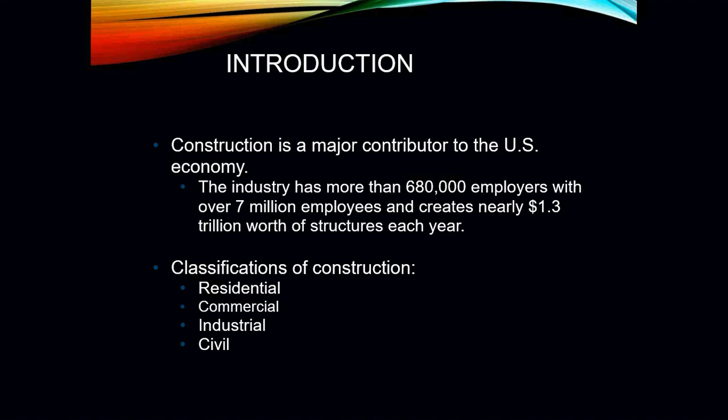Your residential construction really is simply your homes, your single-family homes, your small apartment complexes, condos, areas of that nature would fall under those types of classifications.

Your commercial will fall under all of your offices, your apartment buildings, hotels, stores, shopping centers, malls, maybe even some factories. That's really where those are coming from.

Your industrial is a lot of your refineries, your paper mills, and much larger structures. Your civil construction is all of your highways, your bridges, your airports, your dams, so on and so forth.

In the HVAC industry, we will work on all of these different classifications. If you could think about it, HVAC is pretty much everywhere. We're not just dealing with heating and cooling a space, but we also deal with ventilation. We also deal with exhaust. We deal with every aspect of some sort of air movement and air conditioning.

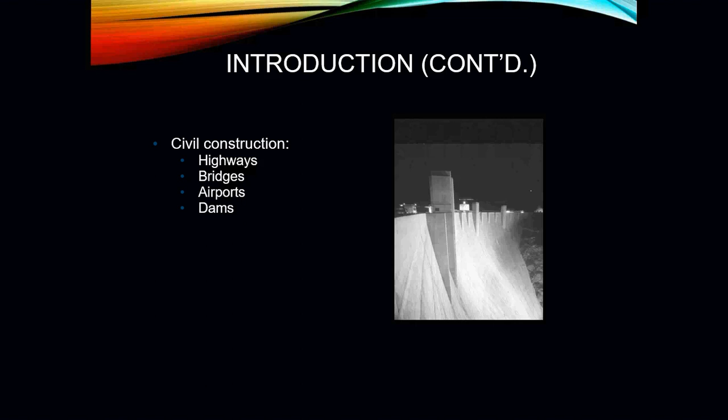With the construction process, the first thing that has to happen is you've got to have some sort of idea and a design. That design comes from the owner. They definitely come to an architect with some sort of idea, some sort of concept that they want to have built. Now that could be a home, that could be a factory, it could be a business. It's unlimited. So the first thing that they do is they're going to contract an architect.

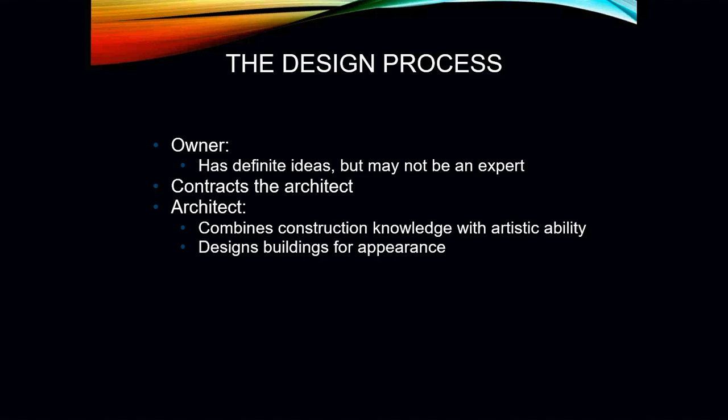An architect is going to have not only artistic ability, but they are going to have construction knowledge, and are going to be able to take those two areas to come up with a design of what this particular owner may want to have.

So architects not only take care of what the building is going to look like, they're also going to help determine the amount of space that's going to be needed for this idea. It's going to help decide how many rooms you're going to need, the type of building.

Is it going to be a wood structure? Is it going to be a brick structure, concrete, you name it? And they're also going to give you a rough idea of how much it's actually going to cost to put the building together.

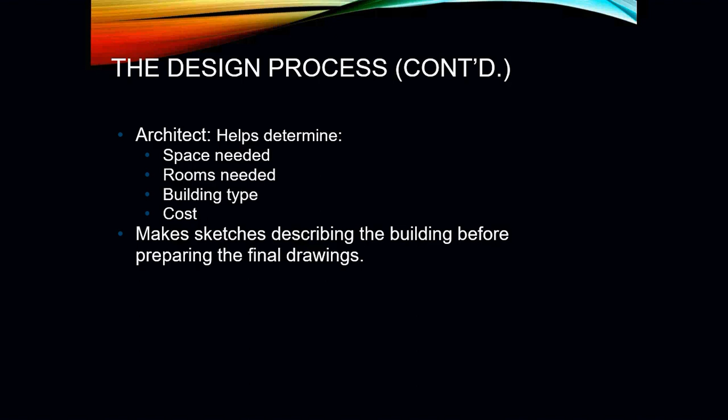They are also going to take everything and put it onto a sketch, basically describing the building before it's actually start to build and before they start putting it into an actual final drawing of what the building is actually going to look like.

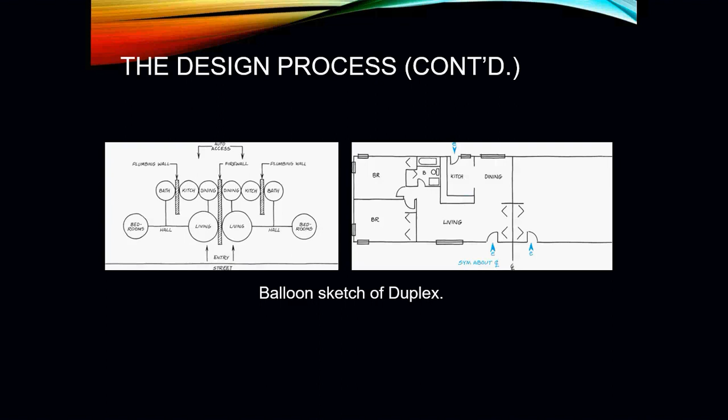So before a lot of our details in a blueprint and in sketches are actually finalized, you've got to have other professionals as well come in and give input and feedback and see what else has to happen before you actually start to break ground.

Now, those other professionals are obviously your HVAC contractors, plumbing, electrical, fire suppression, if that's a part of it. You're going to have roofers, you know, a general contractor. All of these guys are going to come in.

They're going to be reviewing the prints to get an idea of what has to be done on their end, and they also have to be able to follow all of your building codes that specify for their particular area of construction. A lot of our codes come from our International Mechanical Code Book, our NFPA code books, and our International Residential Code Book.

The list just goes on. Really, these codes come from the International Code Council, and they publish several different code books every several years with any changes that have been made. So the industry is always changing and developing.

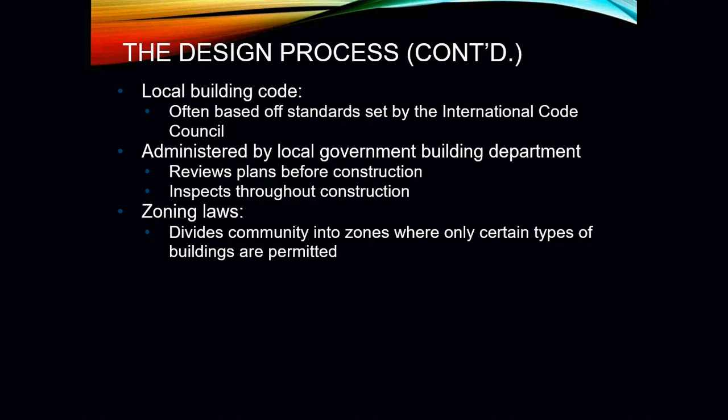And if that ever does happen, there are other procedures that have to happen for that to actually occur. So the building department usually requires specific procedures to be followed. First thing, obviously, you've got to have all of your building permits. Without the building permit, you cannot start to build. Your building permits also notify the building department of your planned construction.

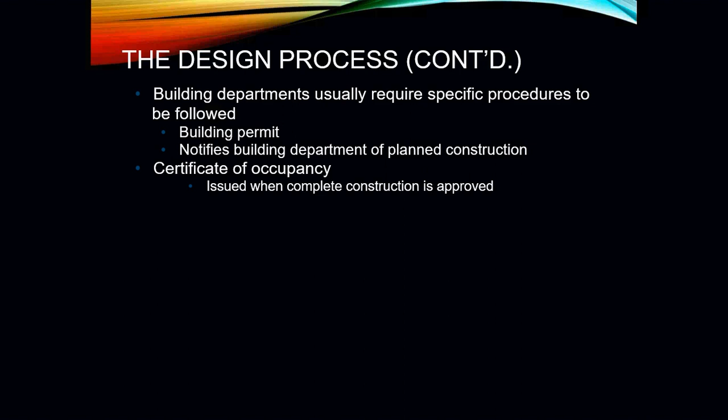It's on the books, they know that it's there, they know that it's going on. Once the building is completed and it is ready for occupancy, the building officials come out, they inspect it, they sign off on the building, and then they issue what is called a certificate of occupancy. That is basically nothing more than an issue that says, hey, the construction has been approved, you're good to go. But obviously, there's more to it than just getting permits and contractors.

You've got to have the money. You've got to also have the money to be able to even do the construction. So beginning after whatever your finished design is that you want it to be, now you've got to go to your lending department, your banks, and get approved for your job. The most common form of that for homes is obviously through a mortgage.

The owner either approves it or doesn't approve it. And if it's approved, now they go to your lending institution with all the proper documentation where they get the financing to build this building.

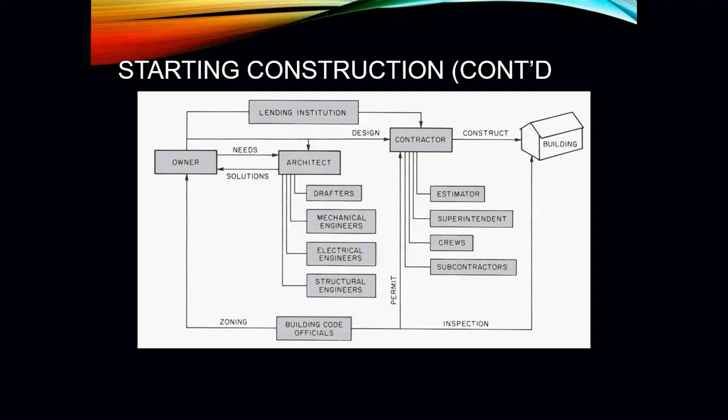Once that's all taken care of, the contractors are now hired. The contractors will then be able to have their estimators, their superintendents, their crews, and subcontractors all involved in making the job happen. Once the building is actually complete, the building code officials are going to come in, inspect the building as it's being built and as it's finished to sign off on it, and give the building a certificate of occupancy.

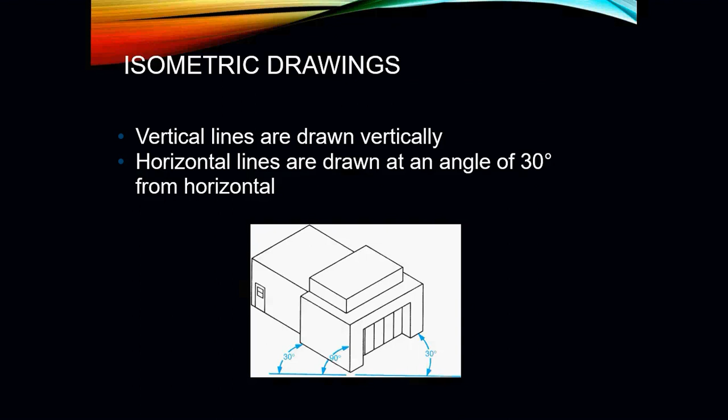When it comes to the drawings of these things, this is where a lot of our architectural drawings come from. They use what we call isometric drawings. These are vertical lines drawn vertically. All of our horizontal lines are drawn at angles of 30 degrees. So it's kind of like a three-dimensional object, which gives the owner and everybody involved an idea of what the building will actually look like.

All the lines of an isometric axes are drawn in proportion to the actual length of your building. Because obviously, when you're looking at something outside, the further away from you, the smaller it gets. This is basically the same idea of what an isometric drawing and a rendering would look like. It's basically giving you a 3D version of what is going to be involved in the final project.

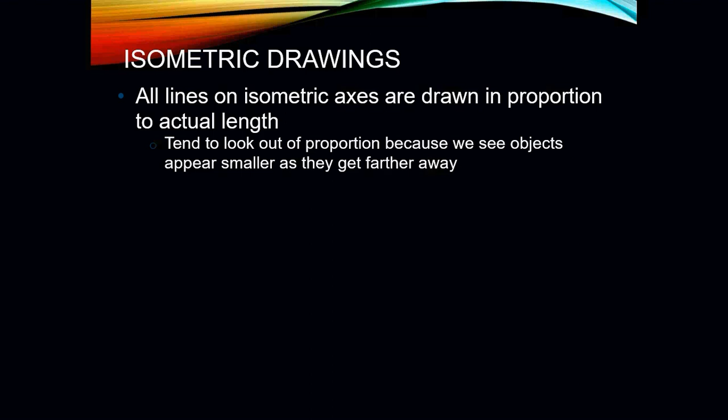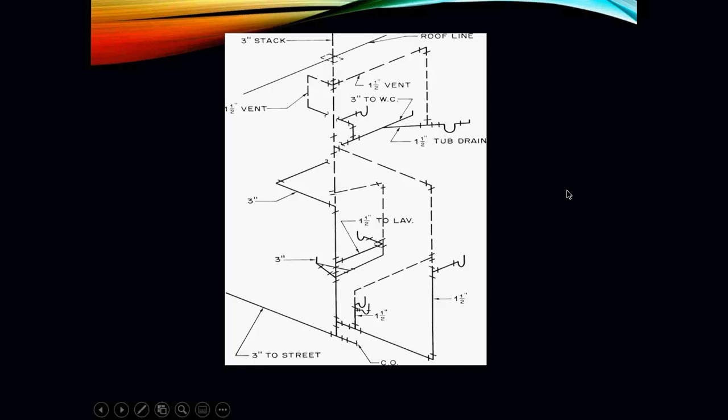Here we have an isometric drawing of a plumbing layout of all of our pipes that are actually going to be laid out. In this case, it looks like it's a 3-floor or 3-family house. We have all of our vents, here's your main vent, here's your street, and here's your traps for your sinks, your toilets, and all that stuff. So this is a basic rough idea of what types of plumbing would be needed to put the plumbing into a home for all of your sinks and your toilets.

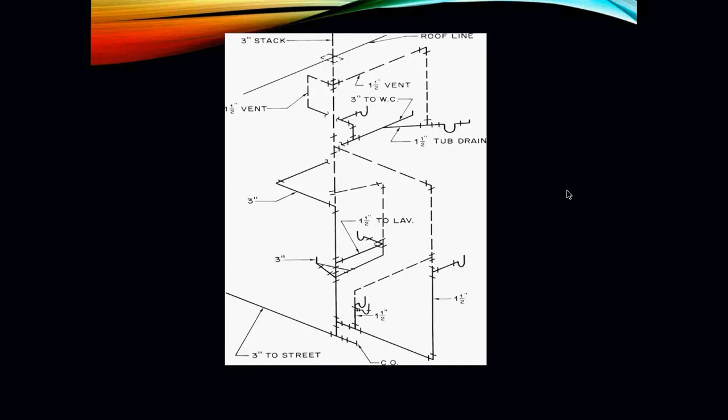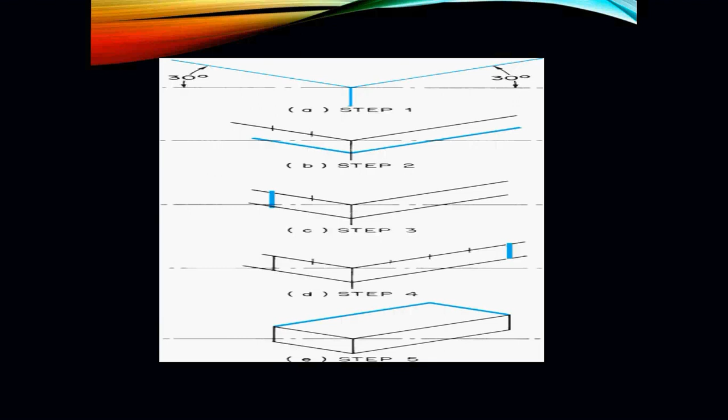That could be anywhere from 1/2 inch per foot, 1/4 inch per foot, to 1/8 inch per foot. You are going to draw these diagrams to represent X amount of feet of building height or length to come up with a total diagram.

And this is another idea of what an isometric drawing would look like. Eventually, as you put it together, it comes into a 3-dimensional shape. You can do an isometric drawing on anything in your home. Just take a tape measure, draw it, and draw it three-dimensional. Everything's at 30 degrees.

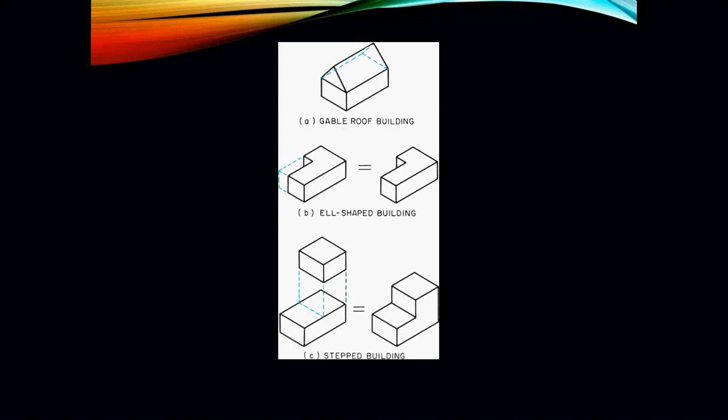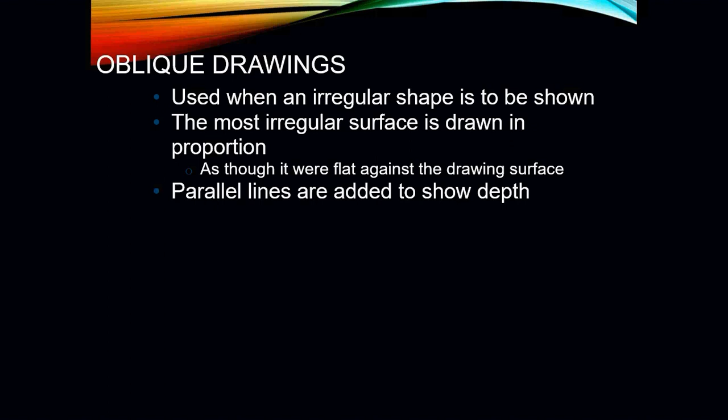Your oblique drawings are used when an irregular shape is to be shown. The most irregular surfaces are shown in proportion as though it were flat against a drawing surface. Kind of think about a home, and you took it and just smashed it against the surface, and it just lays out flat. All your parallel lines are added to show depth.

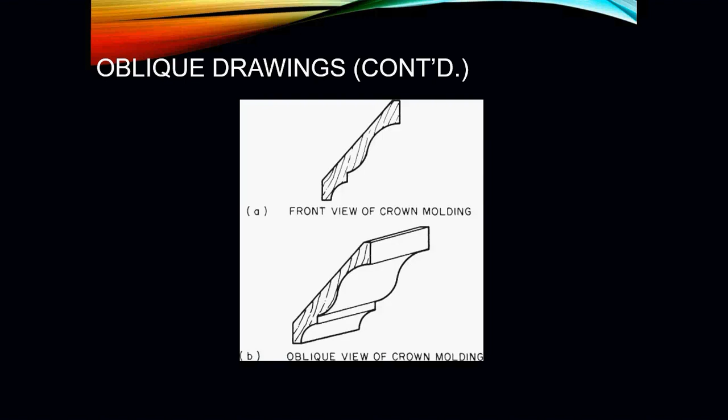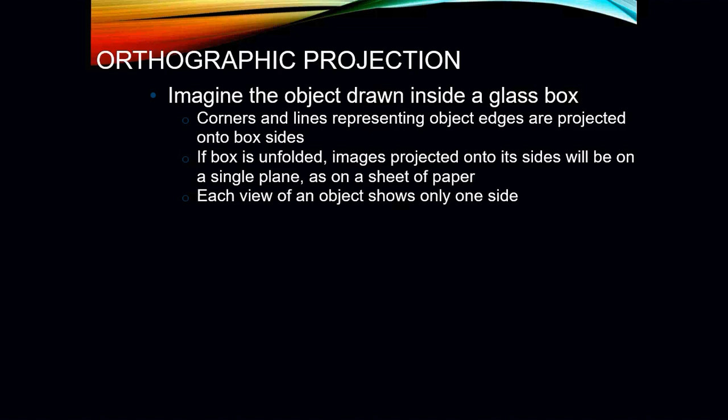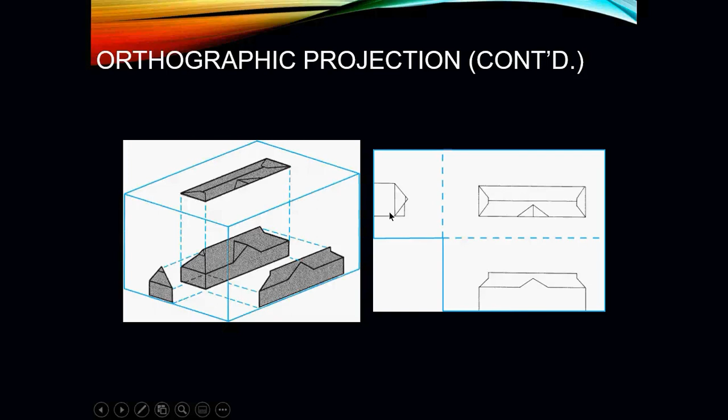You would also have another rendering that would show you each side of the home. So here would be the front portion of the house, here's our top, and here's our side view. So it gives everybody an idea of what the building would look like from all different areas.

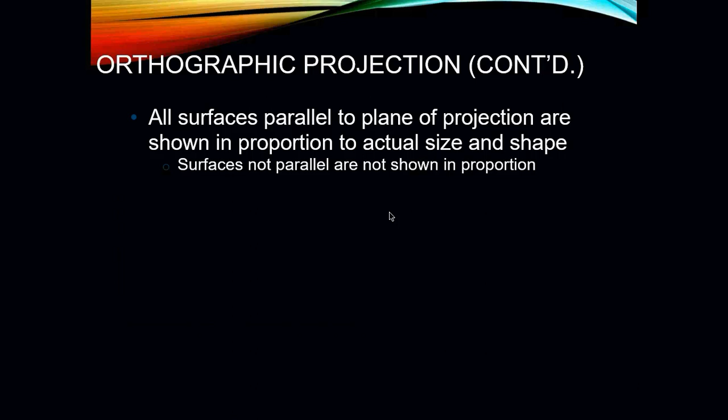All surfaces parallel to the plane of an orthographic projection are shown in proportion to the actual size and shape. Surfaces not parallel are going to be shown not in their proportions.

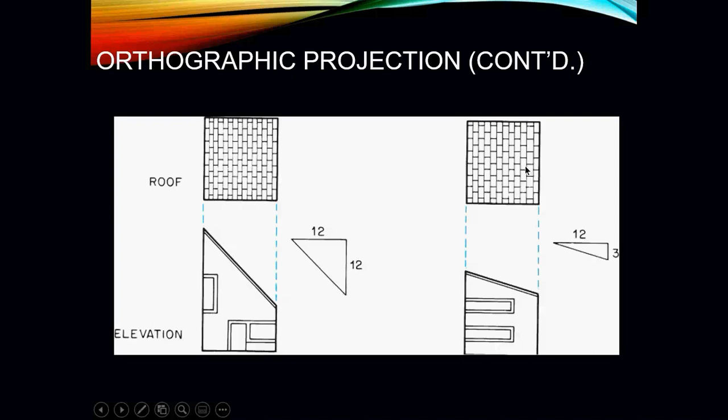So here's an example of an orthographic projection for a roof. It tells us, on a lot of these types of projections, the pitch of the roof. In this case, this is a 12 pitch. This is what a 3 looks like. So it gives you an idea of how steep the roof is going to be, and it's also going to give you the type of shingles that will be used on the roof.

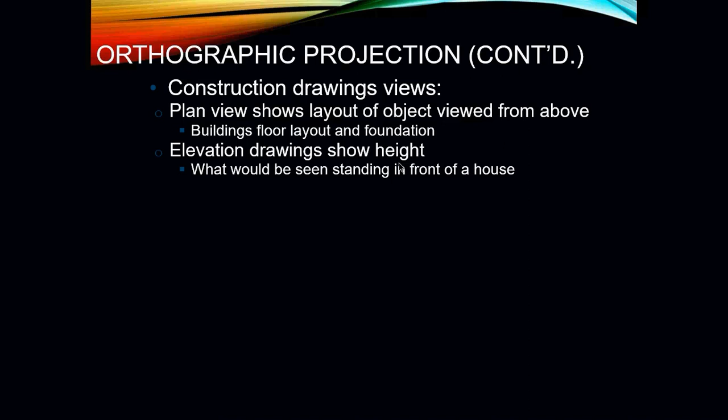Construction drawing views: plan views show layouts of objects viewed from above, such as your building floor layout and foundation. Your elevation drawings are going to show you the height of the building, and what would be seen standing in front of the house, such as what you see here.

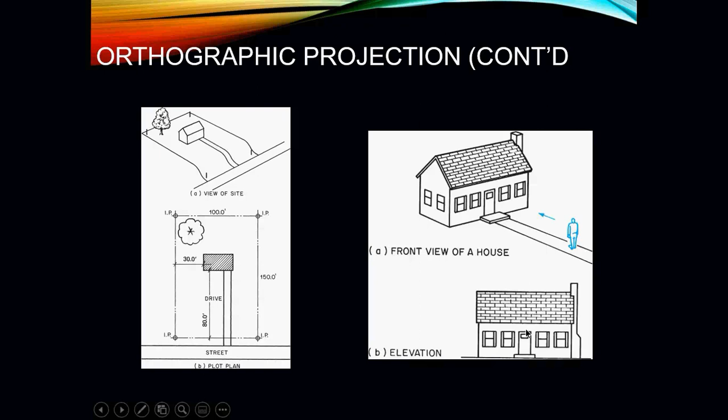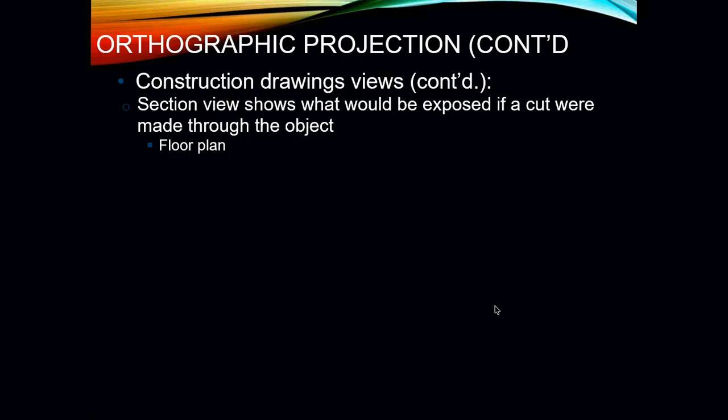Section views show what would be exposed if a cut was made right through the object, which is better known as our floor plan. So if we were to take a floor plan of that building and literally slice it right in half, take the roof right off, we would be having a bird's eye view looking straight down into this home, which would give us the layout of what the building would actually look like.

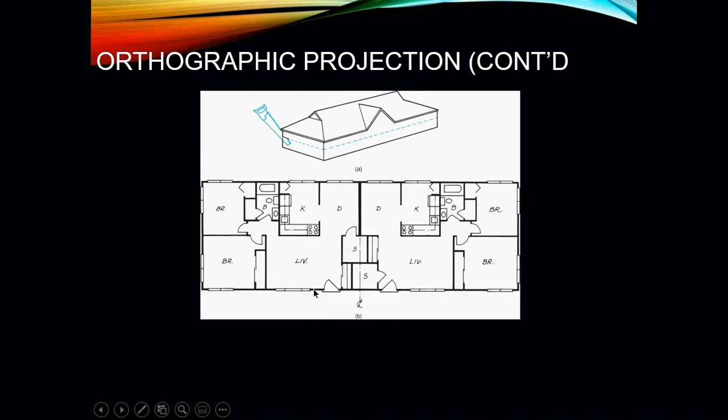A more in-depth floor plan would literally have all of your dimensions, your layouts, where your doors and windows are, all of that stuff, which you can kind of see in this image here. Here's your windows, here's your doors. But in these homes, you would literally have dimensions on your lengths and your widths of all of your rooms.